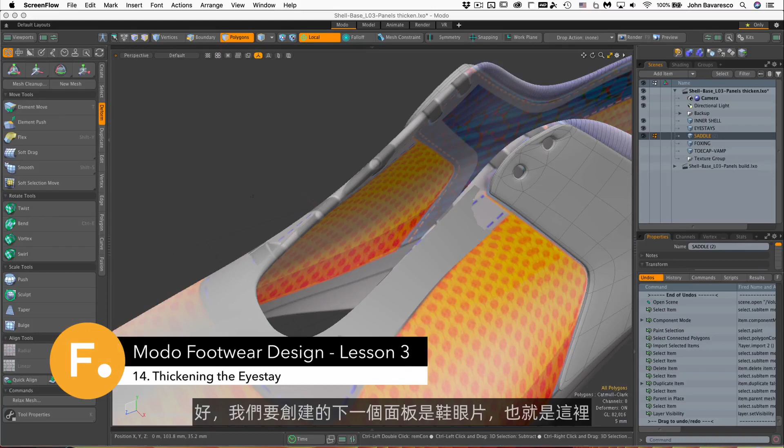All right, the next panel we want to build out here is this eyestay, and it's right there. You'll notice, if I change this to wireframe, that if we look through this—

we can see that the eyestay has eyelets in it, and it also has stitching going around it. So when I thicken this panel, I want to accommodate for both of those things. I'm just going to turn off this saddle because I don't need that to be on.

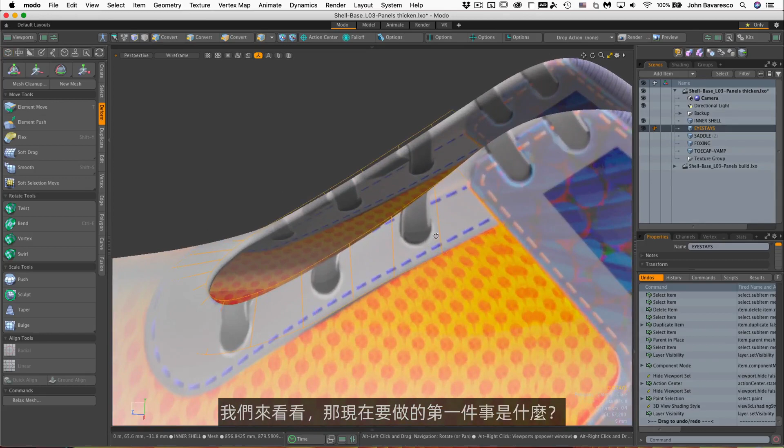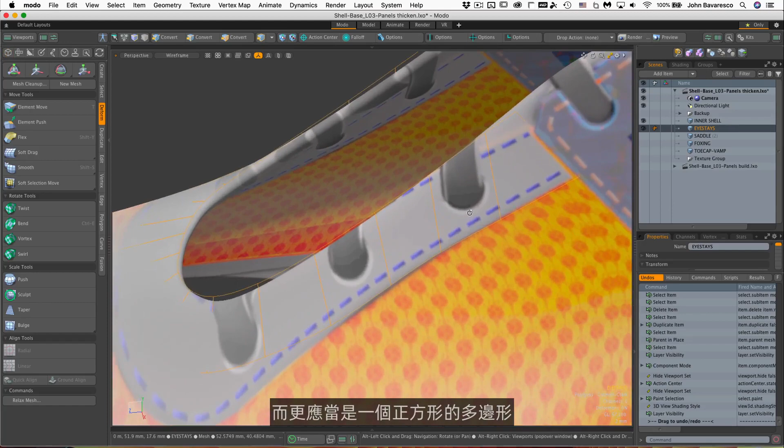The first thing I notice here is that the more square or equal-sided the polygons are for drilling holes or creating holes within our object, the better off we are. So it's not such a parallelogram here, it's more of a square polygon. So I'm going to do a little tweaking on this.

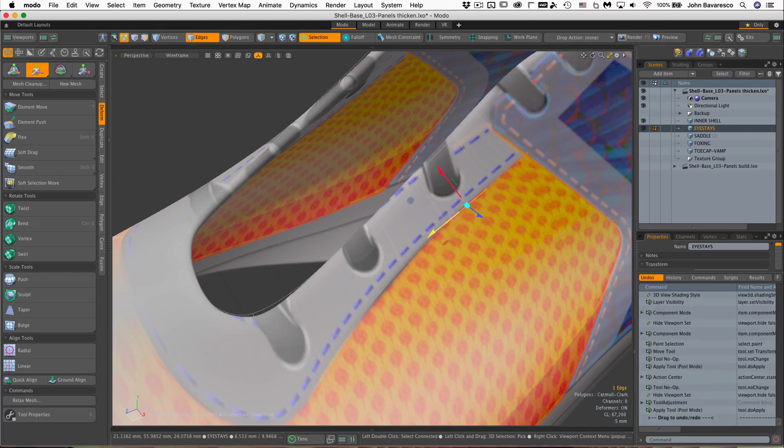If I grab an edge, I can slide it, but I want to set my action center to selection, and that's going to allow me to slide it right along just like that. So this is not such a big parallelogram now.

Now it might be that instead of wireframe, I want to work in shaded mode or texture shaded, some other mode that lets me see it. But as was the last panel, it did kind of sink beneath the inner shell in some parts.

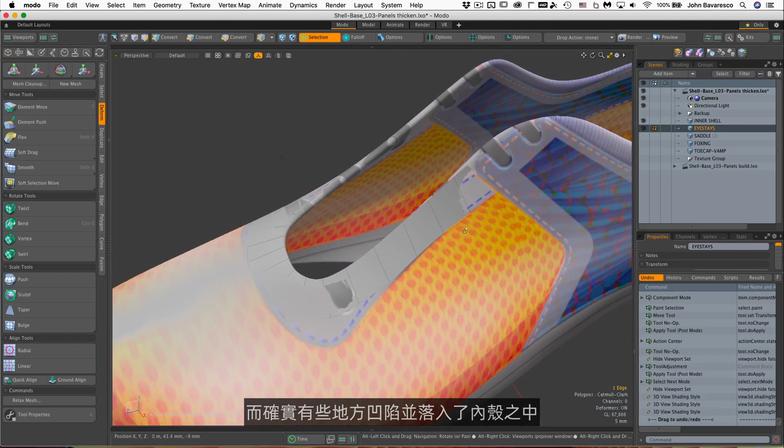So what I want to do real quick before I get too heavily into this is go to the deform panel, go down to push, click on the viewport, and push this out. That's just going to lift everything out equally along its surface normal.

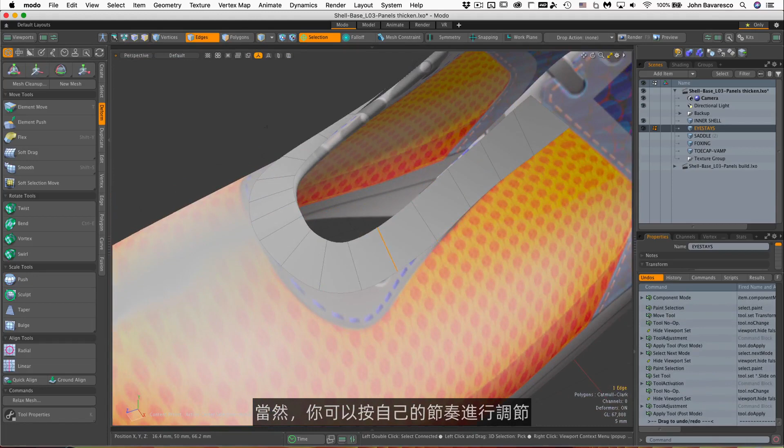Let's go and select some edges. I'll just speed through this process, and you can kind of follow along at your own pace.

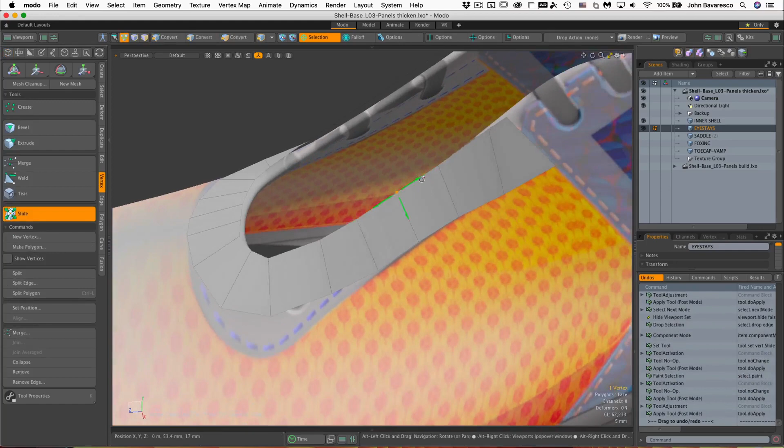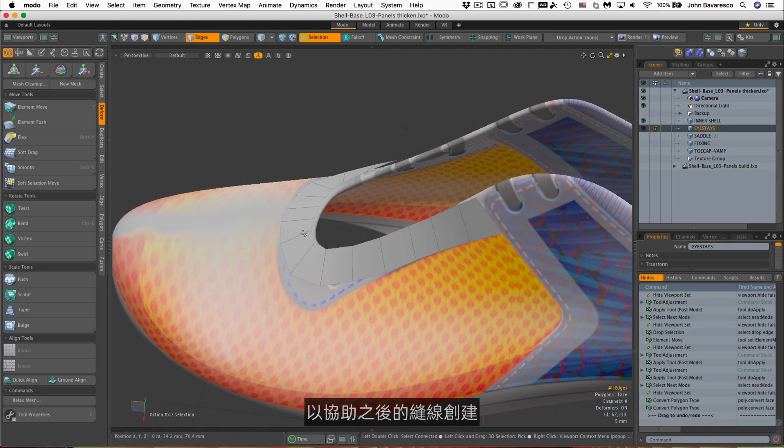I think the next thing I want to do is add a couple of edge loops on this surface to assist when I start creating the stitching. They will help act as a little trough for the stitches to sit in. I'm going to put one on each side here, and add another one right about here.

Now let's see what that looks like. I might need to slide those a little bit, and I'm good with that.

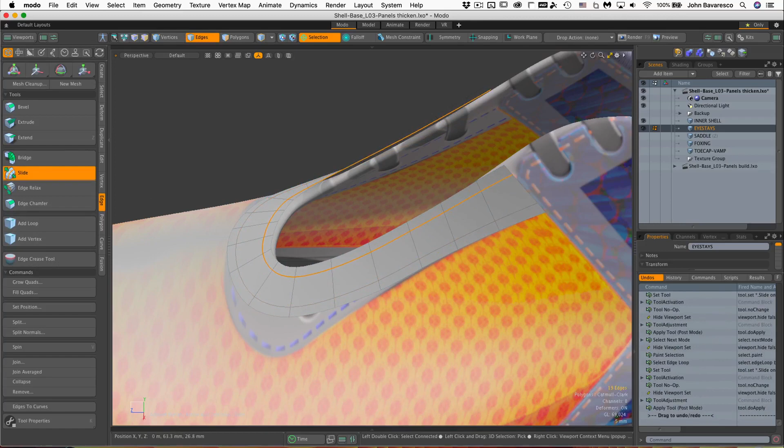Next, let's select these polygons and go ahead and bevel those guys. And same with this one, 2, 3.

Now I'm going to hit the B key for bevel. I'll go to my tool properties, the K key, go to group polygons, don't need thicken. Everything looks good there except for segments, should be set to 1.

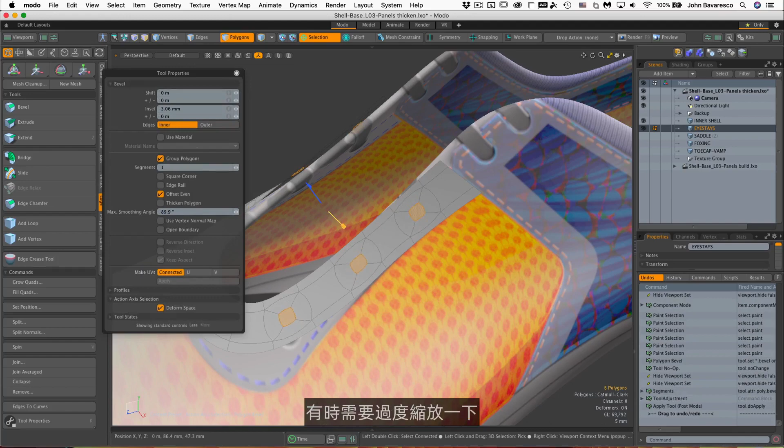And we are good. I'm just going to scale this in just a little bit. Sometimes you'll need to over scale it—scale it in a little farther than you need, because when you delete those polygons, that hole's going to stretch out a little bit more.

Since we have everything selected already, let's go to our deform tool. I'm going to drop that, go to radial, click in the viewport, and those should be all perfectly square.

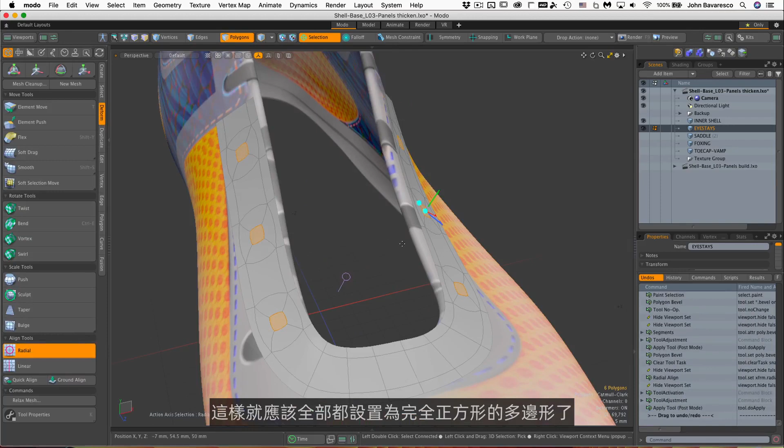Right down there. Yeah, I think we're good here.

So I'm going to select that one, and that one. Hit the delete key, and there we go.

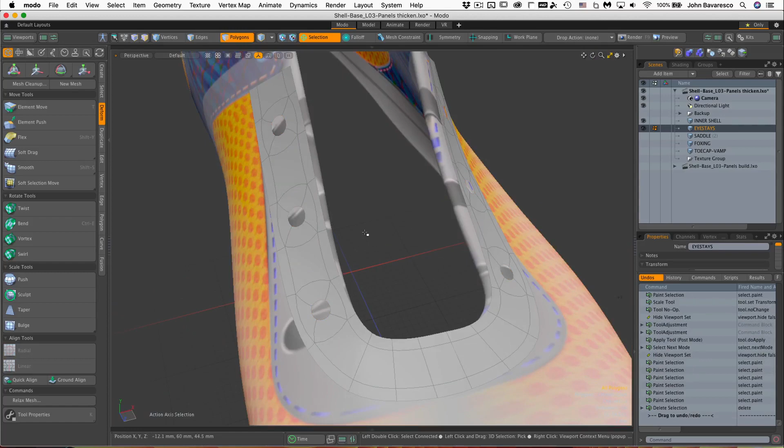Next step is to drop this down inside the shoe. So we're going to go to the deform tab again, go to push, click in the viewport, and push this down so that it is inside that shoe panel there. We're inside the inner shell.

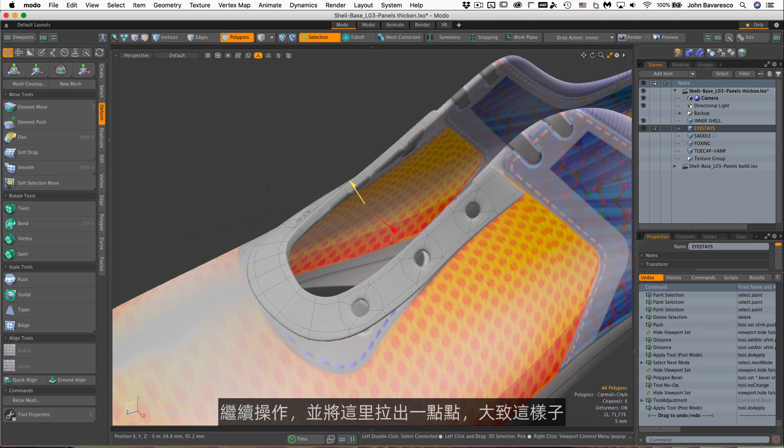Now go to bevel, and I'm going to pull this out a little bit right about there. Yeah, and I think this is working for the most part. We can come back later as we build and make some minor adjustments here and there.

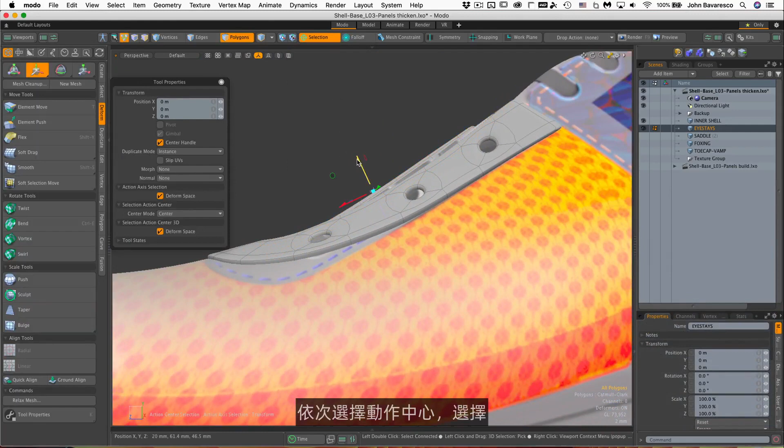All right, now this might be sitting a bit proud, so I might want to drop it down a little bit. Action center selection, and we'll just bring this down just a little.

So yeah, I think we're good for now on the eyestay, and like I mentioned, we could come back later and continue tweaking this panel as we continue our build on the shoe.